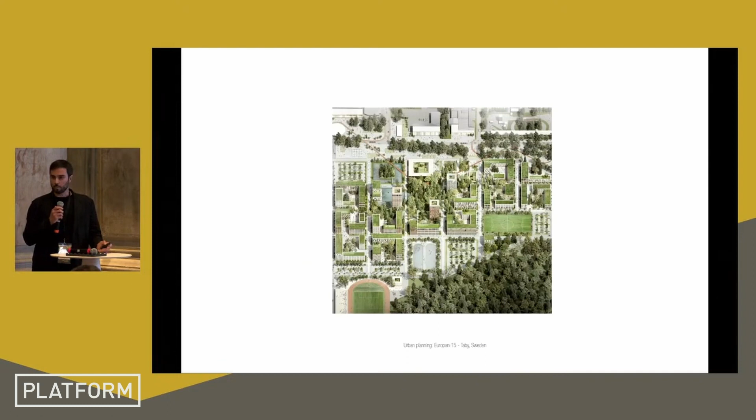Today I want to tell you about two projects. The first is a complex school in Sassa. Sassa is an area close to L'Aquila, a city destroyed by an earthquake in 2009. Today it's still under construction. The project was a winning competition from 2018.

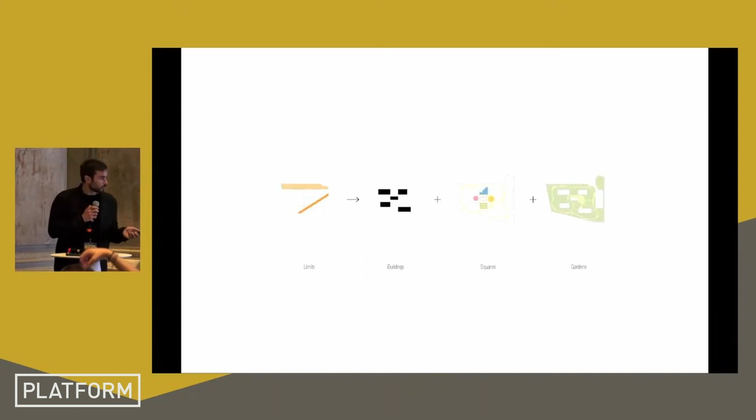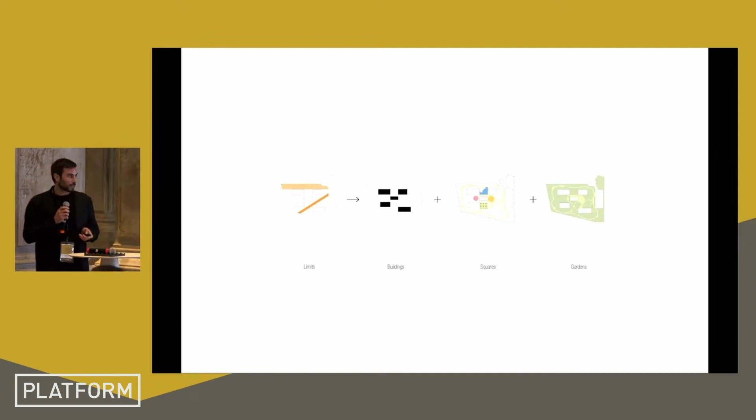The project area is a very nice area, surrounded by mountains and a very nice landscape. The aim of the project, starting from the limits of the site, we chose to build 5 different pavilions, creating different public spaces between the buildings, surrounded by green areas and gardens. The concept was to give the community a dynamic school, like a typical children's playground.

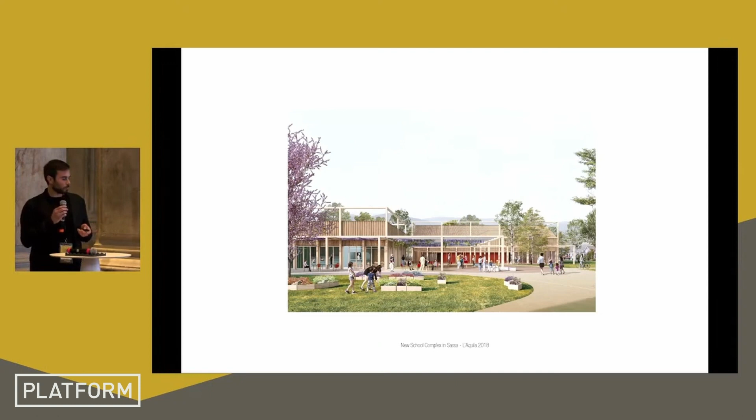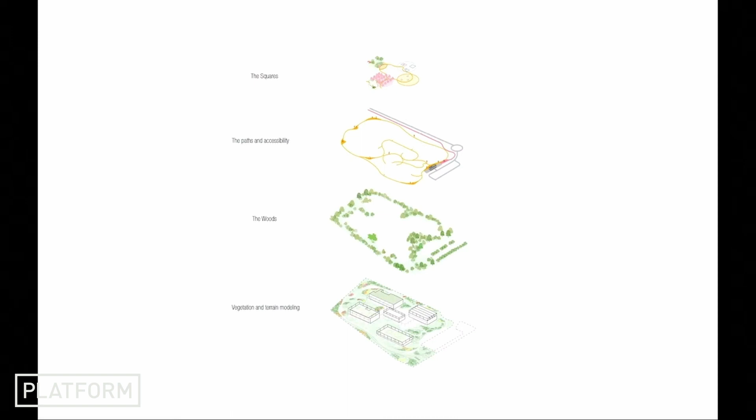This is the system of the building in the area, surrounded by a garden, a real park. These are the layers of the external spaces, with squares, different paths, a real crowd of wood and vegetation. In this image you can see how the building is a sort of scenario, a sort of set in which people, students, can live and share moments, in strong connection with nature.

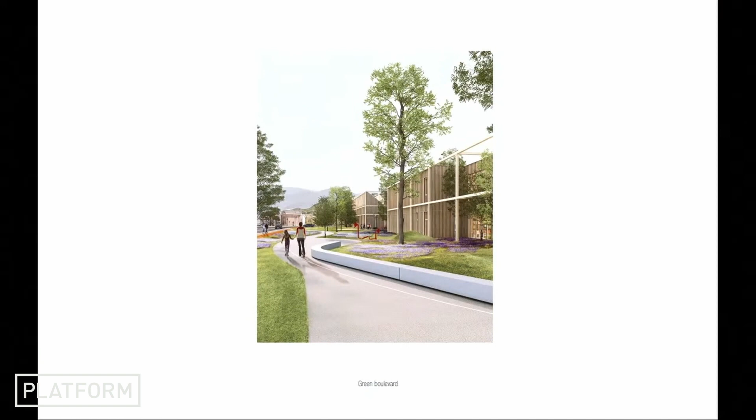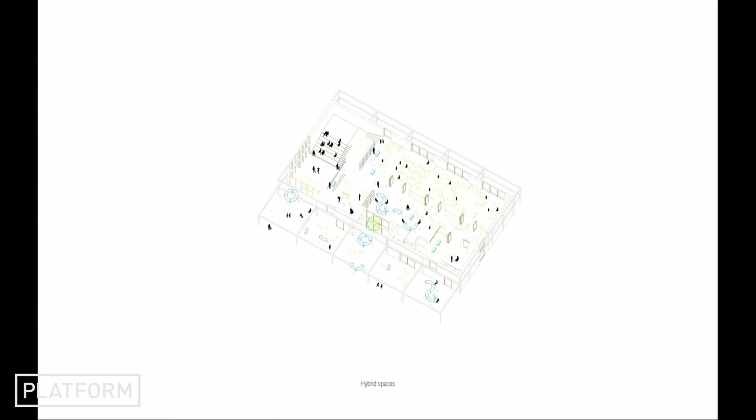Also, the limits between the city and the buildings are characterized by green areas. We decided to use the same approach inside the interior space, because the connection spaces, like the hall and the staircase, become an occasion to share moments together. It's not just an entrance, it's a sort of square, an agora, giving the building maximum flexibility and hybrid space inside the classrooms and didactic spaces.

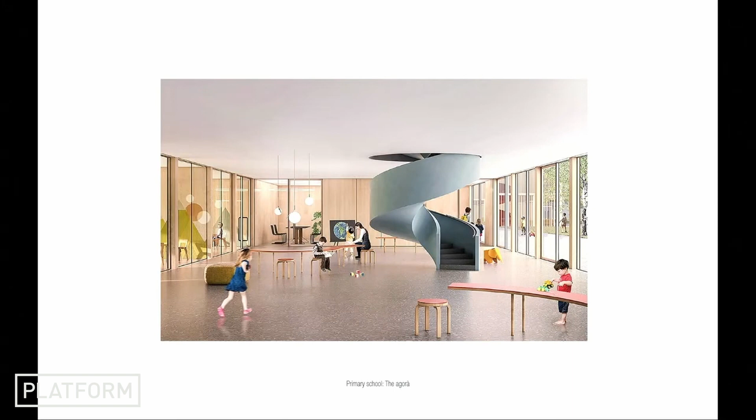Also in the primary school, the same approach: there is a big plaza, a big square called agora. And the same approach for the canteen - it's not just a space for the school, but can also become a cafe and offer space for different events related to the city and the school. And of course, the gym.

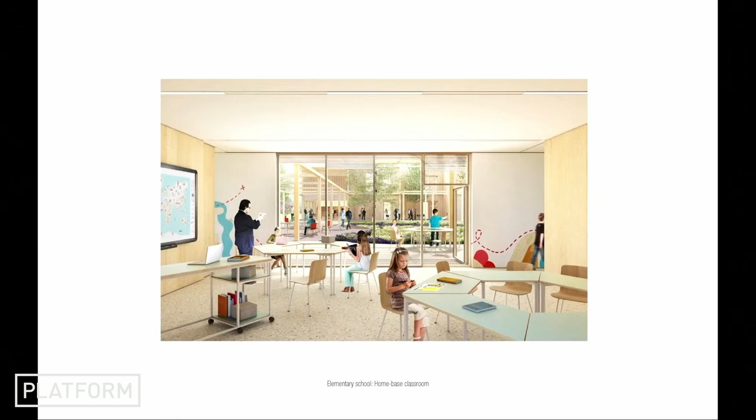The interior spaces are characterized by hybrid connections between different classrooms, longitudinal, transversal, but also from inside to outside. This is an image of the home-base classroom - you can see the strong connection with the outside spaces. At the same time, the corridor is not just a connection, it becomes a real sharing space for students.

Now we are at the final stage of the final drawings, so we hope to give the city a new space in which to share moments not only related to the school, but also related to the city and the community.

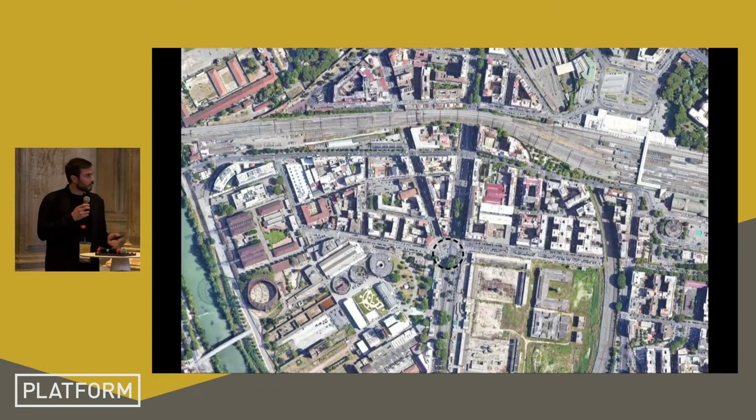The second project is called Skyframe. Skyframe is a site-specific installation shown in the exhibition. It's located in Rome, in a very interesting industrial area. It's a project we did for the Festival of Architecture of Rome last year. The area is very nice, it's called Ostiense. It's close to the Pyramid. It's an industrial archaeological area.

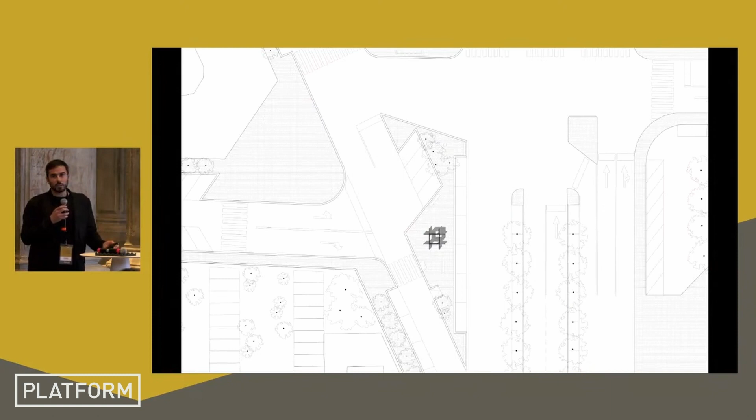Basically, the space was a parking lot. The idea of the installation was to transform this parking lot into a public space in which you can live and experience the city. The project is inspired by the pure volumes of Mario Sironi's industrial landscapes, and we chose to give the passerby an experience through an industrial and architectural space.